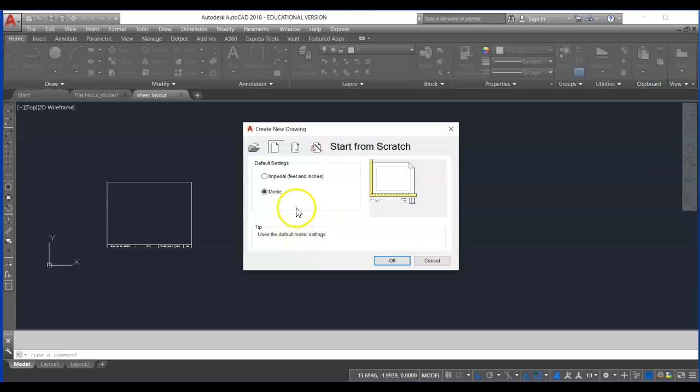Okay, this drawing we are going to do the flat hook. The flat hook is metric, and we will ultimately put it in the sheet layout. I have the sheet layout open, but I'm not going to draw it there because it's in inches. So I'm going to go to File, New, and draw it in metric. I'm going to choose a metric setting for the unit.

Alright, first thing I'll do is start out with a circle. I can go center diameter. The smaller circle is a 45 millimeter diameter. The larger circle has a radius, center radius, and I'll snap to that center radius of 50.

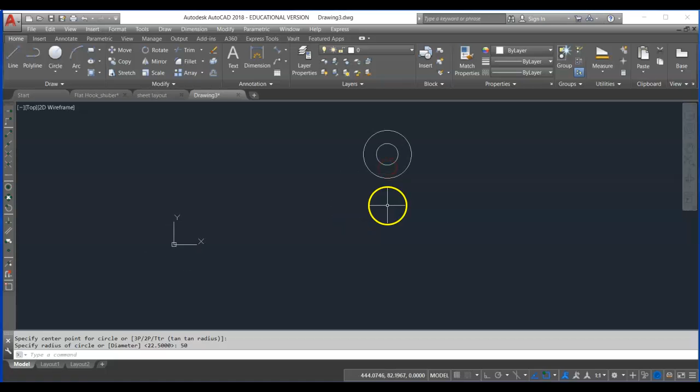So the bottom, the hook part, is a large circle. I'm going to get it started from the top here. I'll go center radius, and it has a radius of 130 millimeters. I draw it from that center point, and then I'm just going to move it. I'll make sure my ortho's turned on, and move it straight down a distance of 180 millimeters.

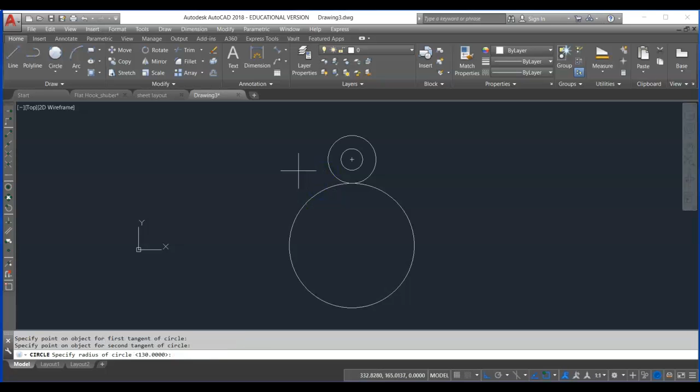I'm going to do a TTR circle right here - tangent, tangent, radius. That radius is 50 millimeters. And then I'll put this smaller circle in here. It has a radius of 62.5 millimeters, so type that in, 62.5.

Alright, now I can go ahead and trim this up here if I wanted right now. Trim it.

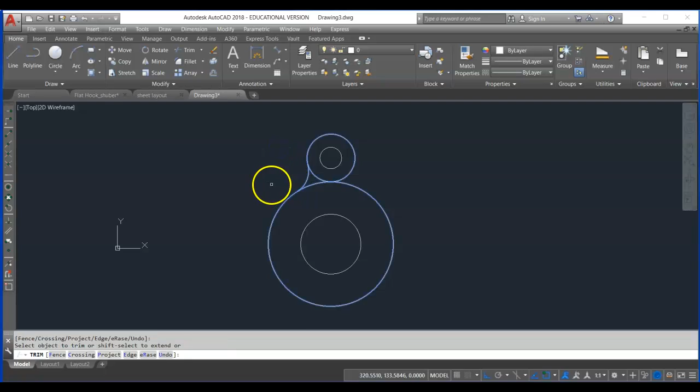Next thing I'm going to do is put a line, and snap the tangent to this circle, snap the tangent to this circle. I'm going to offset this line, offset distance is going to be 125 millimeters, offsetting it down to there. Then I'm going to put another TTR, tangent, tangent, radius down here, with a radius of 25 millimeters.

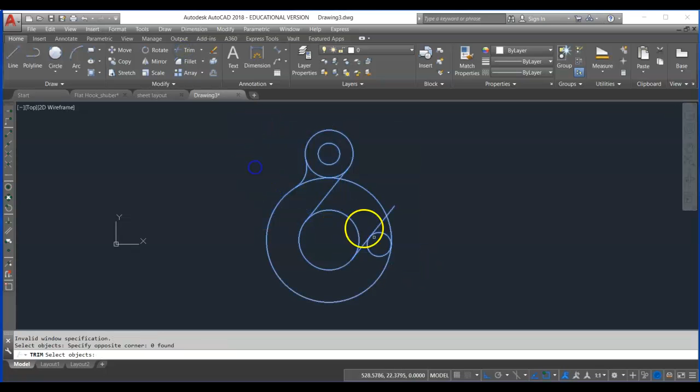And now I can go ahead and trim all that up. There's a lot of trimming here - trim this out, trim that out. Might have to do some deleting afterwards. Some of this stuff won't trim, so I'll just select it and delete it. Finish trimming this arc out.

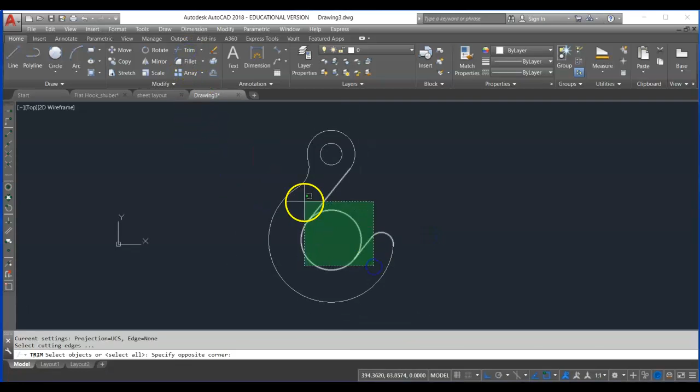Alright, before you put this in the sheet layout, I want you to take an area calculation of this thing. This is important to go ahead and do this area calculation before you do any scaling.

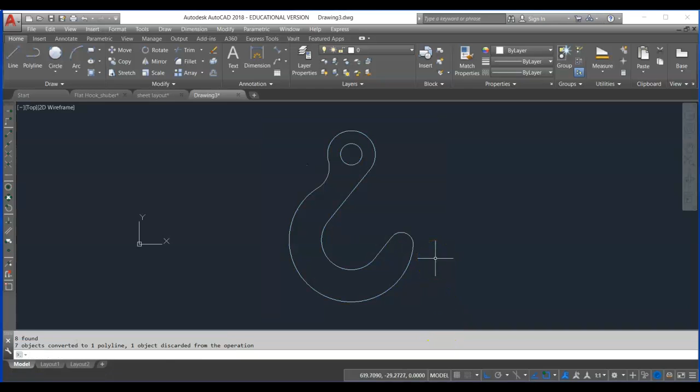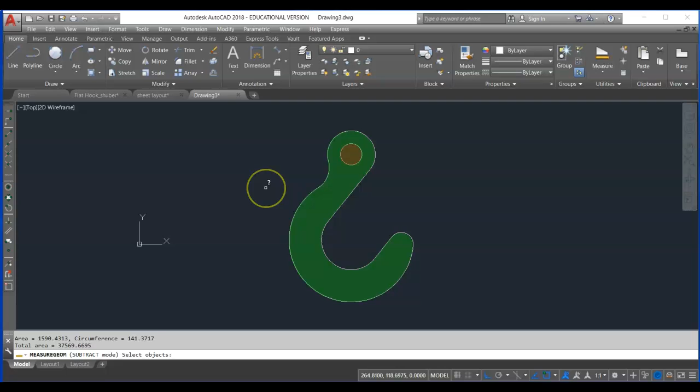In order to do the area calculation, we need to join this all together because it's individual entities. I'm going to go ahead and select it all and go to Join, and it's all joined together. Now I'll do my area calculation - go to Add Area Object, add that, hit Enter, Subtract Area Object, and I need to subtract this little hole. Then I get that area calculation. You want to record that area calculation.

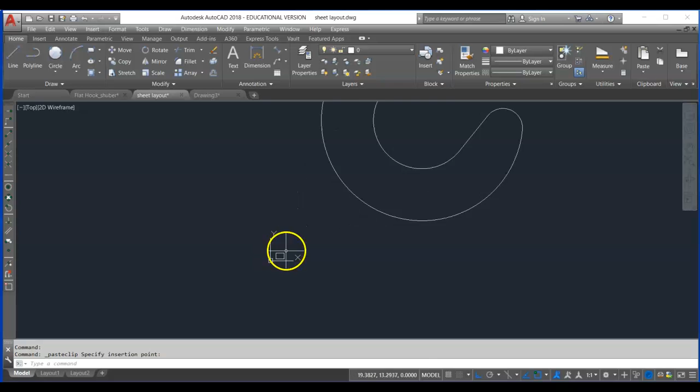Alright, so we're going to put it in the sheet layout. I'm going to select it all, do a Control C, go to the sheet layout, Control V, and put it in. Notice my sheet layout is very small, the flat hook is very big.

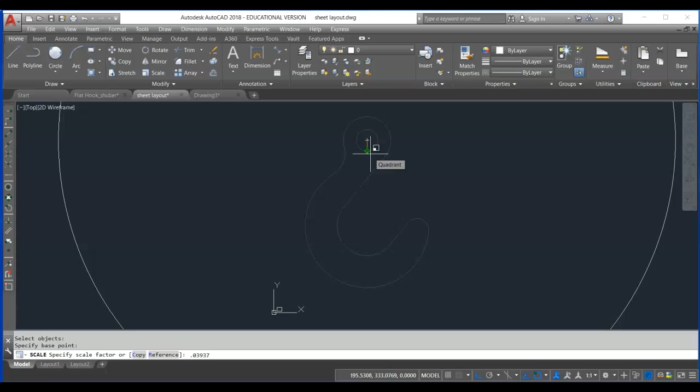So we're going to scale this down, but in two parts. First, we're going to scale it down to convert it from metric to inches. I'm going to go to Scale and select it all. Our conversion factor is 0.03937 - that's 1 divided by 25.4. So we'll hit Enter there.

You'll notice it's pretty small up here, so we're going to move it down. Turn my ortho off, get it a little bit closer to the sheet layout, and I'm going to zoom in. But I still want you to notice it's still too big to fit in the sheet layout.

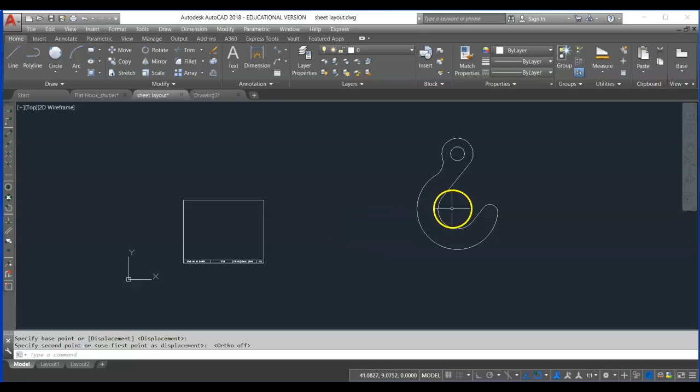We're actually going to scale it down now in half. So we're going to go to Scale, select it again, select the base point, and type in 0.5. So we're scaling it in half - the first scale was converting it from metric to inches.

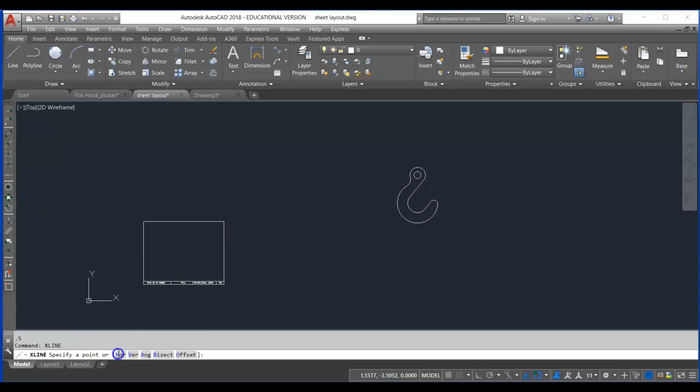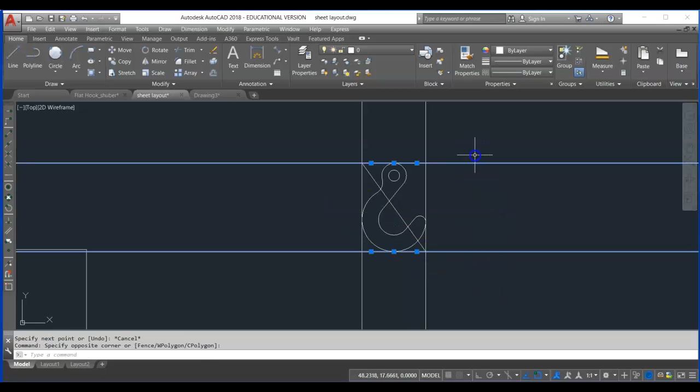Now what I want to do is get my center point here so I can insert it in the sheet layout. So I use my X line, construction line, horizontal, snap there, escape, space bar, go vertical, snap there. I'm going to zoom in, trying to get to the right spot. Go to line, put a diagonal line from intersection to intersection, and delete my X lines out, leaving my diagonal line. I'll put another diagonal line in over here, as I always do.

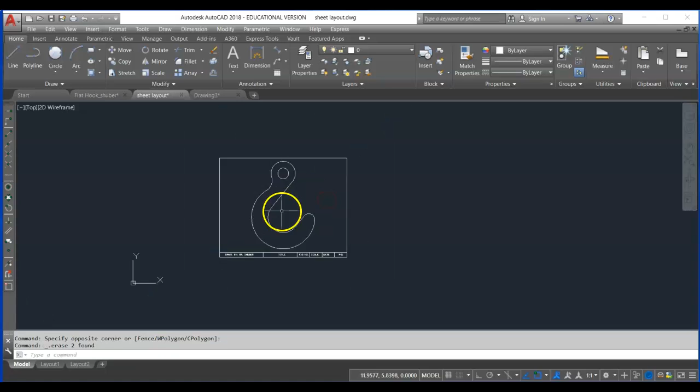Go to move, snap that midpoint to that midpoint, and we're all centered up. Delete those lines. Now I have the flat hook centered in my sheet layout.

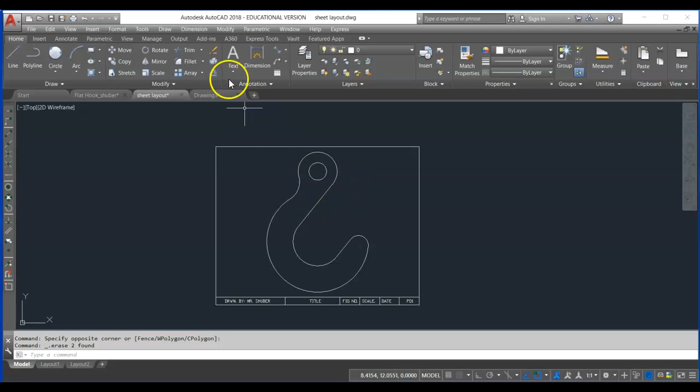I'm going to put dimensions on here, but these are tricky because we need to change the measurement scale since we scaled it twice - converted from metric to inches, then halved it. So in dimension style, modify, instead of just inversing to 25.4 like before, we need to double that since we scaled it in half. So we're going to use 50.8, which is 25.4 times 2.

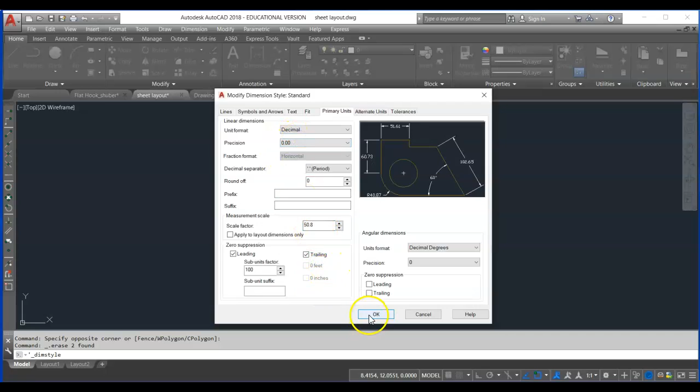We're going to drop our precision down to 2 decimal places again. Remember, I only like you to do that on a metric drawing.

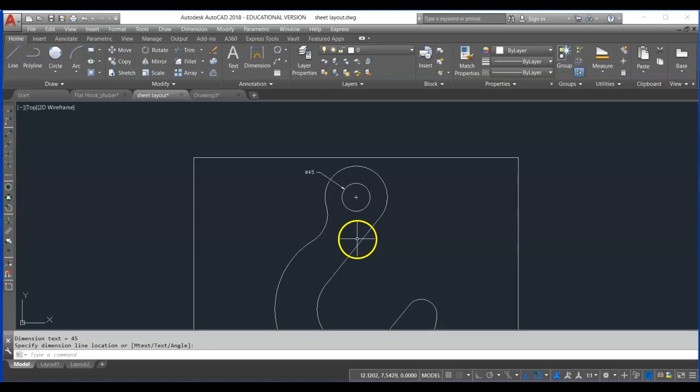Let's see what we got here with our dimensions. I'm going to dimension this diameter, and it should read 45 millimeters in diameter. If you don't have it reading that, you didn't scale it properly or put the right value in to scale the measurements back up - we're basically tricking the dimensions to read what we want.

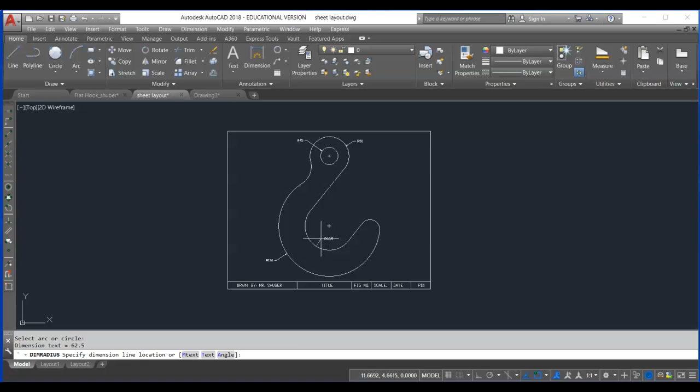I'm going to go through and finish these dimensions. There's a radius there, and got a radius down here. I've mentioned this before, I always like to do my radius dimensions first, and I don't like that there - I'd rather it be on the other side. So radius dimensions, I got another radius dimension up here and down here.

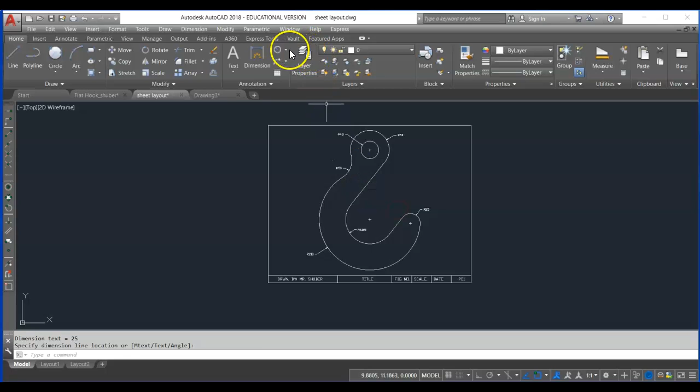I have a couple linear dimensions here. I have a linear dimension from this center point from there to there. Notice all my dimensions are reading accurate.

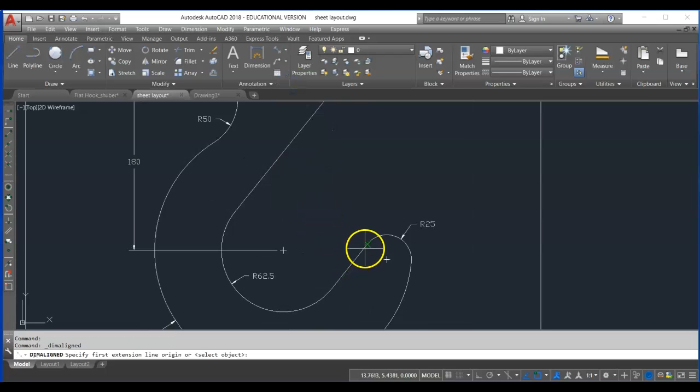This dimension here is going to be tricky, I need you to pay attention. We're going to do an aligned dimension, and I'm going to choose the highest point here, this end point. What's important is we have to choose our perpendicular object snap, and that'll keep my alignment just right.

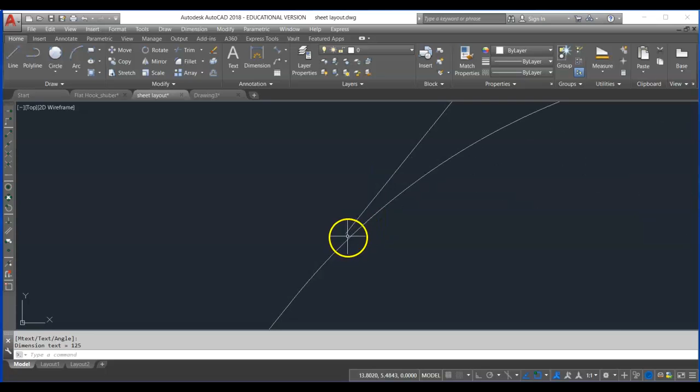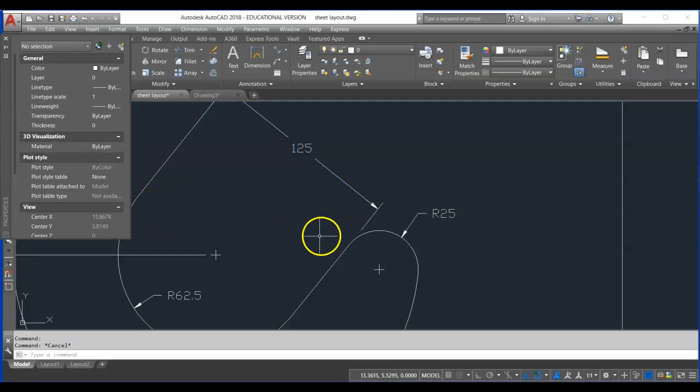If you look down here, I've mentioned that I don't like these endpoints to touch, or extension lines to touch the object line. This one doesn't, but it's very hard to see. So let's go into the properties on this dimension, scroll down to extension line offset, and bump that up to 0.25, a quarter inch. Now we have a nice little gap there just on that dimension.

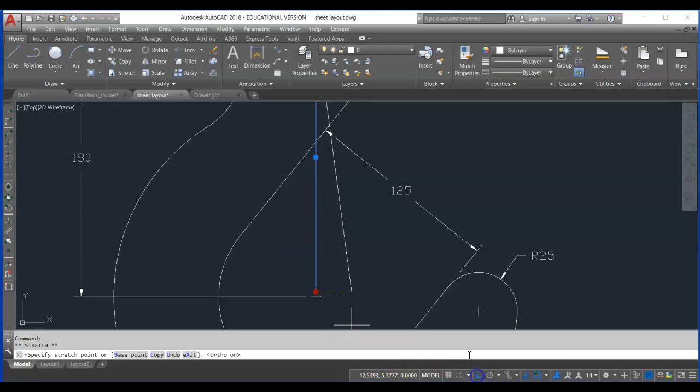Next, put your center lines in. Let's snap from center mark to center mark and put our gaps in, making sure ortho's on. What's nice is since our scale is matched up to the size of a sheet of paper coming out on our printer, everything's scaled to 8.5 by 11, and we can use the same numbers here with our center lines because of that.

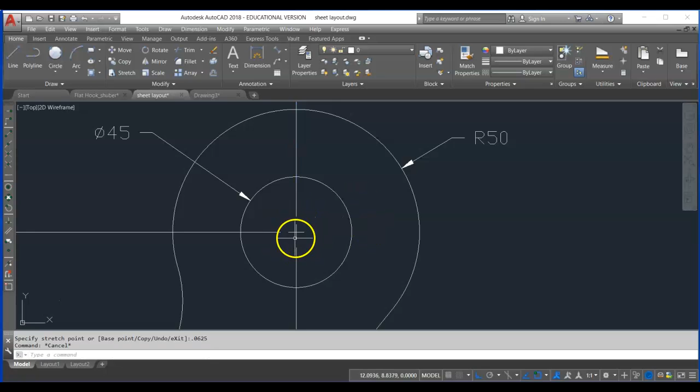So we're using a quarter inch extension beyond there, 0.0625 gap here, and our dash should be 1/8 of an inch, 0.125. All of those numbers can remain the same because the size of our sheet layout never changes - no matter what, our object can be a different size and we'll scale it up or down, but our sheet size always remains the same.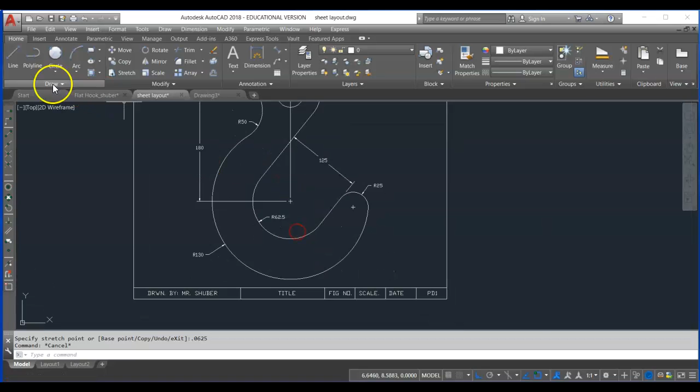I will show you how to put the scale in here in a minute. We'll go get these center lines in - 0.25, notice how it's close but it doesn't touch. Make sure you get gaps here, 0.0625, and let's finish this out.

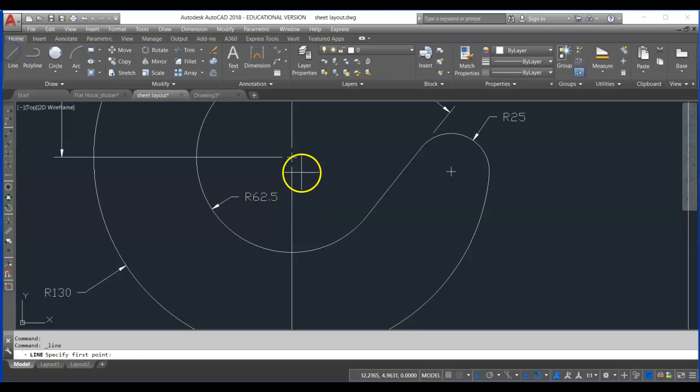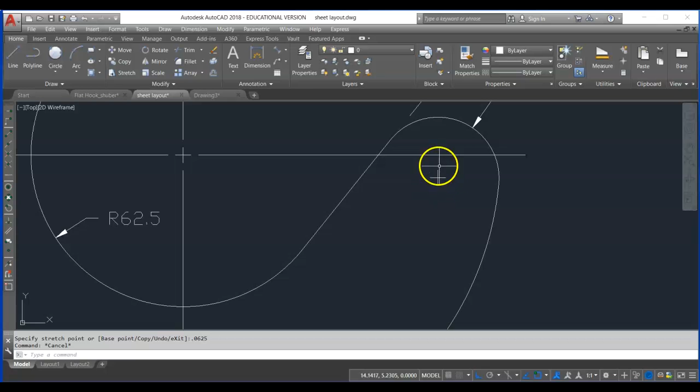We are going to take this all the way out to the outside here. I actually go longer, come back, snap to that intersection, and then go out 0.25 again to be specific. Now I know that this arc here is not the center of that, but we need to show that this center point is off from this line here. So when you bring this center line out, it shows that it's off a little bit, which is what it's supposed to be.

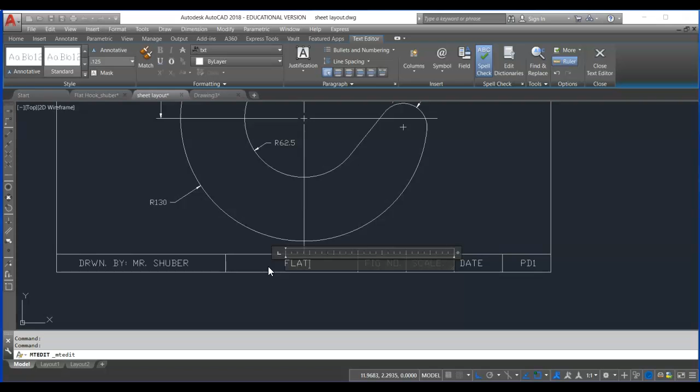All right, so we got center lines in, we have our dimensions in. Last thing we want to do is update our title block text. Down here we're going to type 'flat hook,' and once I type that in, I'm going to recenter it.

Figure number here, this is the 5th drawing in chapter 2, so this is back still at chapter 2, CH2-5. The scale here, you need to pay attention to this.

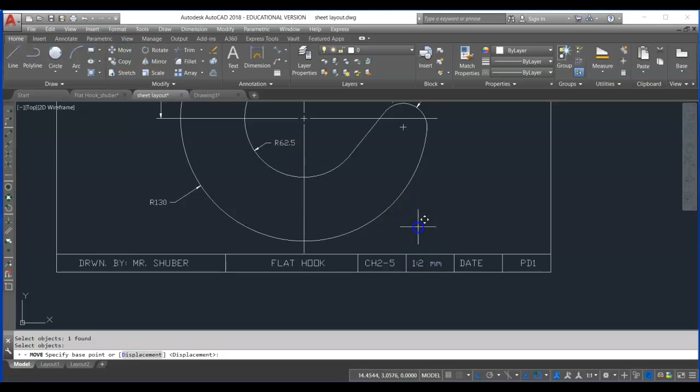The scale is going to be half size, so we're going to do it as a ratio, different than we have before. Half size is a 1:2 ratio, and then we're going to put mm for millimeters to show that it's metric. So pay close attention to how we do this scale - it's a ratio of 1:2, and millimeters is our unit.

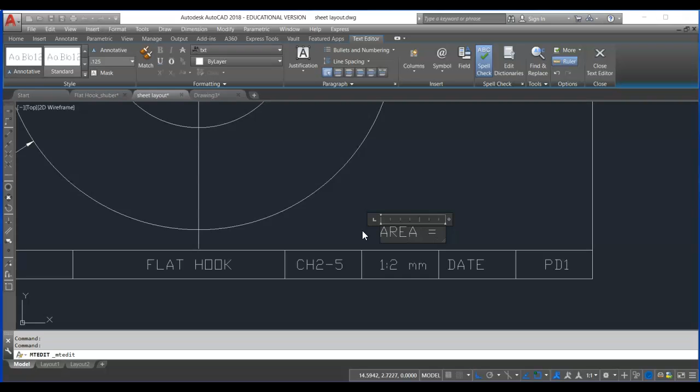So put your date in, update that. Now one last thing I want you to add, just like we did on the gasket drawing - we're going to copy this text up and double click on it, and we're going to put the area calculation in here.

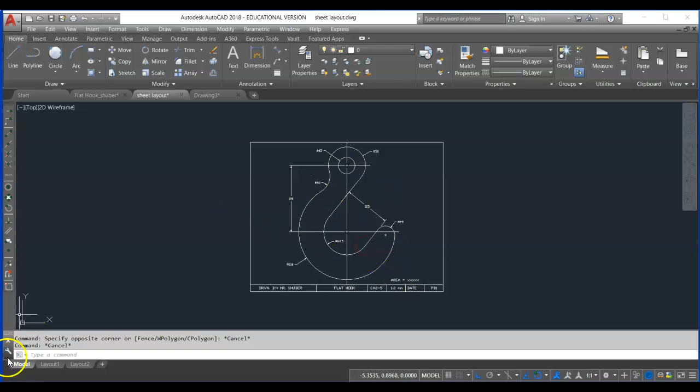I'm not going to show you what it is because that's giving the answer. I want you to put your area calculation in there, and that will complete the flat hook with the area calculation. Thanks for watching.